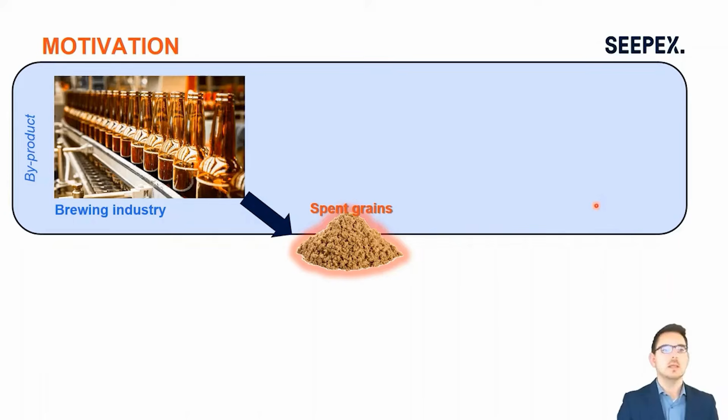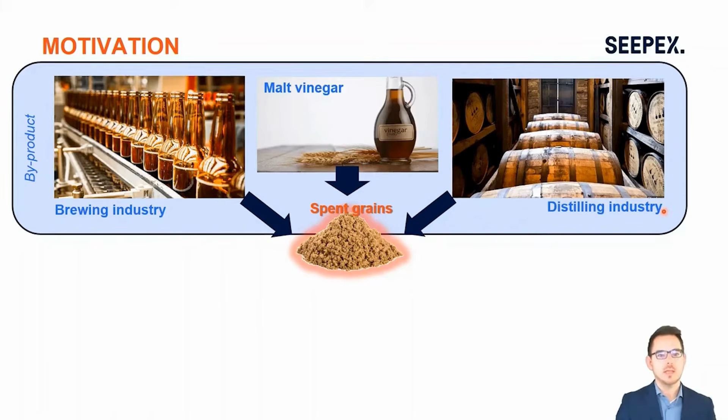Motivation. So why is spent grain transportation so interesting? Because it occurs in many of the industries. So we see it in brewing industry, also for the malt vinegar production, and also in the distilling industry, that spent grains are produced and that it's a byproduct for you in your industry, because you would best get quickly rid of this product because it's once processed and then it's for you not so interesting because it goes further into animal feed production, or also for the renewable energy industry for the production of biofuels.

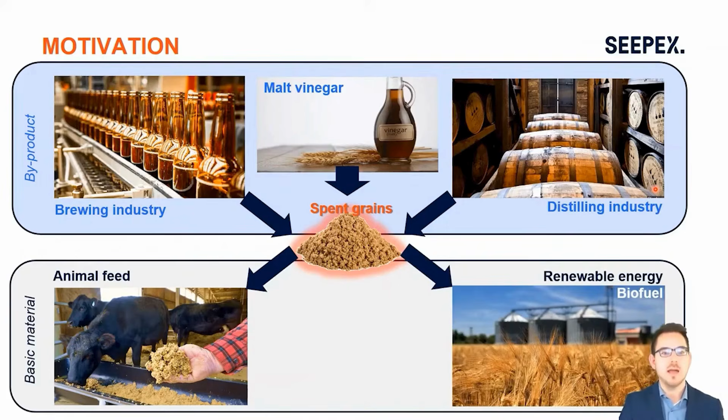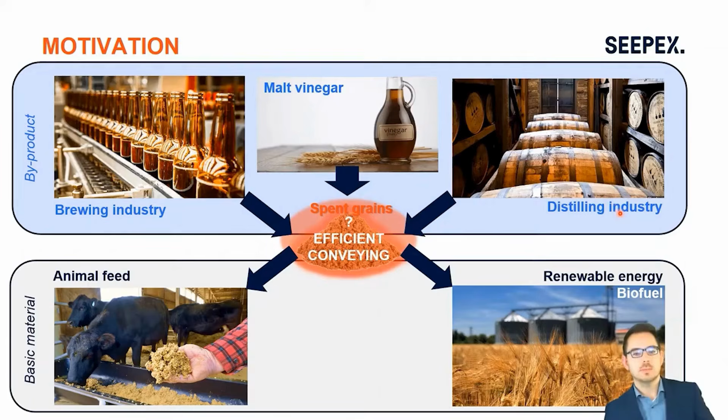And in all these steps, spent grain, which is highly abrasive and also viscous, has to be conveyed. And that's the question we are dealing with here. How is this spent grain transportation done very efficiently? A further motivation comes from the industry of brewing and distillery. We see increasing requirements on process efficiency in these industries. So especially total cost of ownership considerations get more common, and also the energy efficiency of all your processing equipment is quite commonly considered.

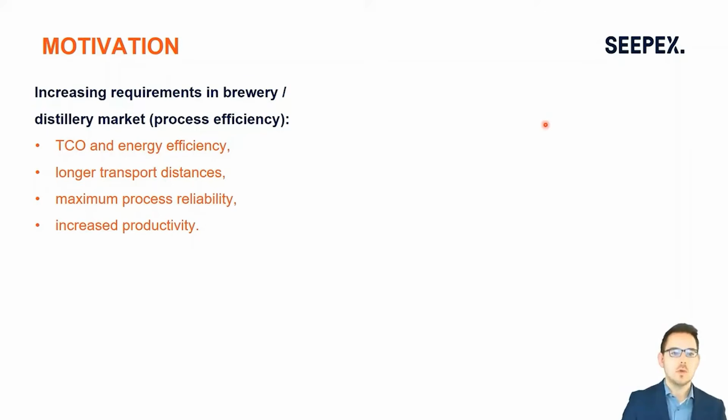And since the building density in most of the older and historical breweries and distilleries is rather high, more often when they would like to expand and increase their productivity, longer transportation distances of 100 meters and even more are quite common to occur. And another point is process reliability, especially when you have slight changes in your processing, different wetness content, in order to ensure that you stay with your productivity is quite important. And our answer to this is Smart Air Injection.

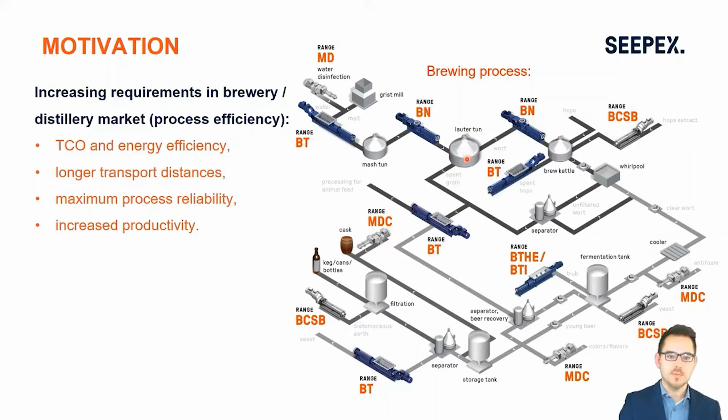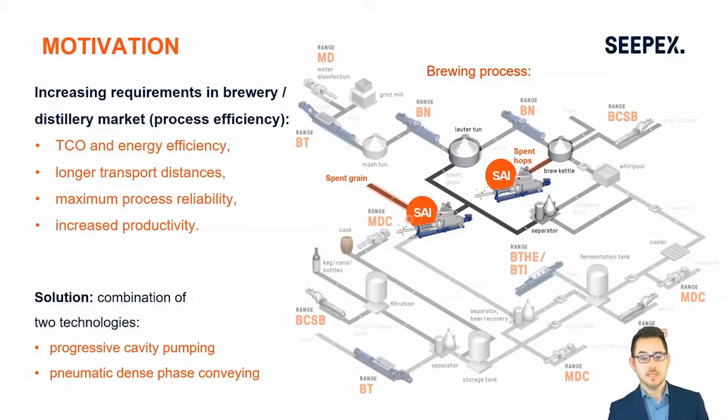So if you see it here in an example brewing process, after your lauter tun or mash tun or mash filter, when the spent grain is processed, we apply here a combination solution which is called SAI, and which combines two known technologies, which is a progressive cavity pump, that's our bread and butter skill, and that is combined with a way of pneumatic conveying, which is called dense phase conveying. In order to see the benefits of SAI, I would like to compare it to conventional solutions of pneumatic conveying, which are pneumatic expeller units like a Ponndorf or Wette unit.

And the challenge on conveying these spent grains is that it's highly abrasive and also highly viscous, and so could not very easily be conveyed by a pump over a certain distance. And the common way of doing this is by pneumatic conveying. First with a screw conveyor, so the spent grain falls from the mash tun or mash filter into the screw conveyor. It's conveyed into the discharge pipe, and then you use a type of lean phase conveying where this granular media of spent grain is blown with a constant flow of compressed air through your system and thereby conveyed onto your destination.

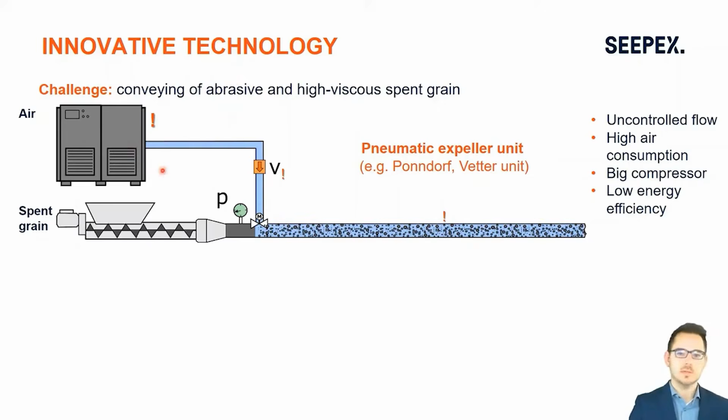And what you require here is a very high velocity of compressed air going through the system, and you need it constantly because it's an uncontrolled flow of compressed air, and therefore you need a very large compressor. So usually also for mid-range or larger breweries, we see compressors in the range of 100 kilowatt installed motor power, even more. And this is because you cannot buffer the compressed air on the way to the conveying, and you need it constantly all the time. So the compressor is running nearly all the time when you would like to convey your spent grains down the line.

In contrast to this, we see here on the bottom the smart air injection system, and it looks quite similar because you also have an air line where air is supplied to your system, and on the bottom the spent grain transportation line. You also have an extension hopper where the spent grain falls from your mash tun and mash filter into, and inside our pump a screw conveyor that first conveys the spent grain into our pump element.

This progressive cavity pump element is the main difference between a Ponndorf system and a smart air injection system, because we can thereby overcome a certain pressure level inside the pipework and use the usual way of pumping to generate 30 or 35 meters of plugs inside the pipework that are quite stable.

And this is only done by pumping. We then use the pneumatics to further convey this down the line like a pneumatic post system. So once those plugs are generated of spent grain by our pumping, then by a purposeful and short-term air injection, we accelerate those plugs and shoot them down the line.

That helps us because we do not need constant air, only very short and infrequent instances, which minimizes our air consumption and gives us the ability to buffer the compressed air used. We have time intervals of roughly 5 minutes between two injections, which allows a small compressor unit of 10 kilowatt installed motor power to achieve enough normal cubic meters of compressed air, buffered in a storage tank and then used every 5 minutes for the dense phase conveying down the line.

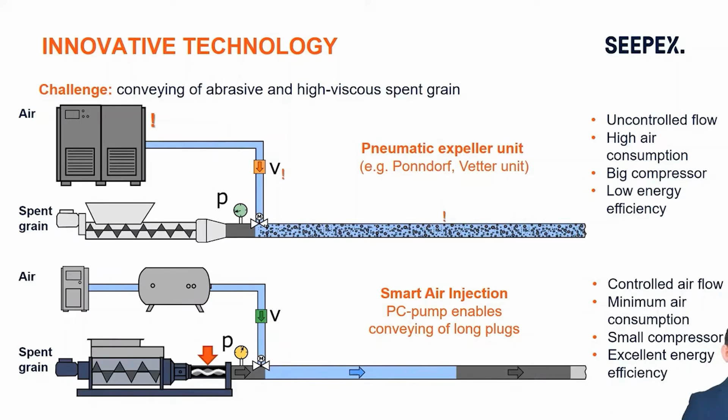What is the benefit you receive by this system? We could significantly reduce your total cost of ownership, especially regarding energy costs for air. In different validation studies we achieved a reduction up to 80% in air consumption, and that goes directly with the energy costs required.

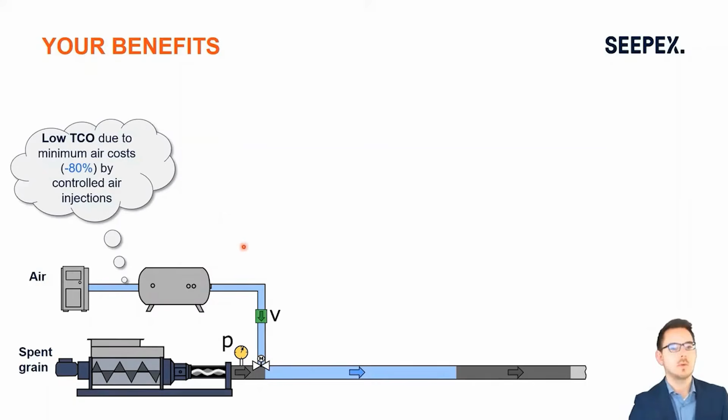We can increase the process efficiency because we reduce your mash out times. In some applications we could reduce from 55 minutes down to 22 minutes by exchanging the screw conveyor of an expeller unit with a progressive cavity pump, because it's rather constant and independent of the different operation points.

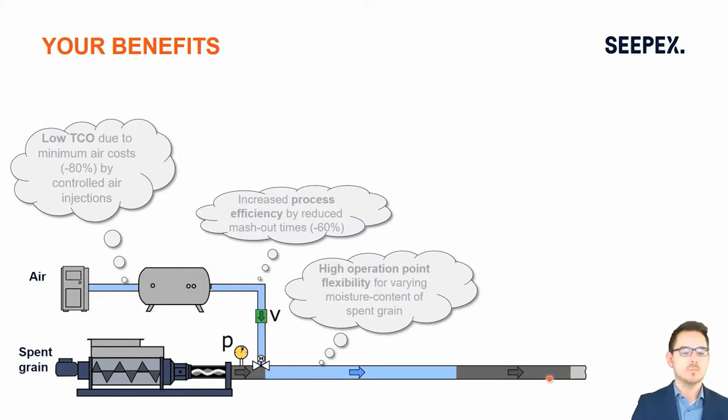So if you have varying moisture content in your spent grains, the pump runs independently and constantly the same, and the spent grain is further conveyed by dense phase conveying. If you have a stable plug of medium, it's independent of the moisture content and always runs the same, which makes this system quite stable.

We enable flexible piping, multiple bends is not an issue, and also vertical transportation of 30 meters and even more. We enable a transportation distance of up to 1 kilometer, because we use this type of dense phase conveying.

Another benefit we bring to the customer is that we reduce the wear sensitivity of your pipework. What we know from other larger breweries is that with a Ponndorf system they often have to replace their entire pipework every 3 to 4 years, because especially in the bends they have significant wear occurring, the material breaks down, and they have to replace the entire pipework.

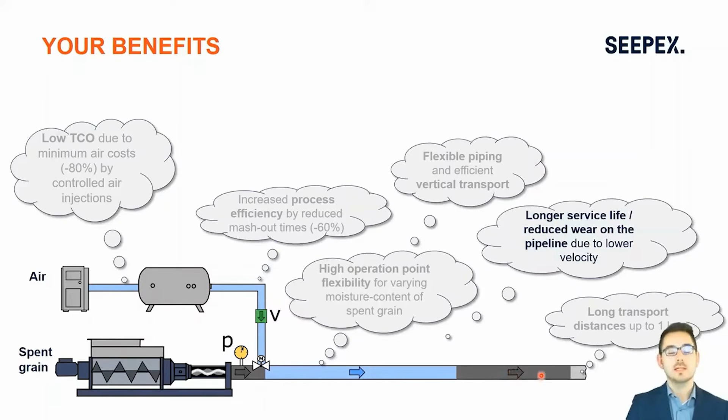But the benefit we have with this dense phase conveying of SEI is that we bring down the velocity of this conveying type to 3 to 5 meters per second, instead of 30 meters per second for the lean phase conveying of a Ponndorf system. That goes directly with the wear sensitivity of your system, and the systems we have set up with SEI have never had to have their pipework changed.

Let's come now to the conveying concept, the SEI controller logics, and the condition monitoring. If I tell you now a pneumatic system is very, very efficient, you are maybe struggling a bit. That was also my first impression, because I know from my studies at university that a compressor is rather bad in efficiency. Nearly 90% of its efficiency goes to heat instead of compressing the air.

But it could be efficient if you use it very purposefully. If you compare different types of pneumatic conveying, this lean phase conveying is one where you need air all the time, constantly, and you blow with very high velocity at a lower pressure this granular media through your pipework.

So from the ratio of air amount that you have to use and consume to convey a certain line, the loading of a medium is rather bad.

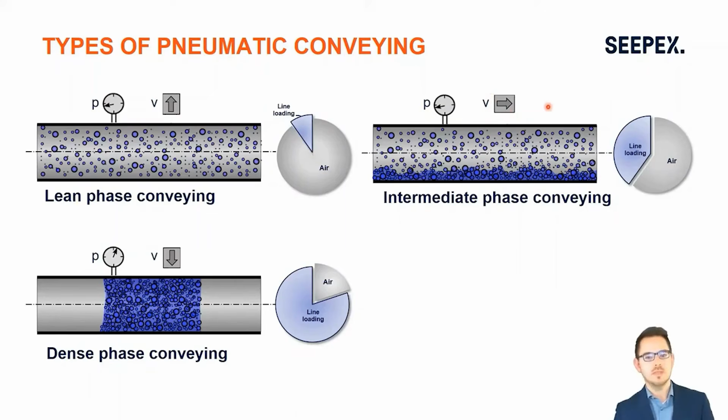We have in between this intermediate phase conveying, which is also quite bad. You have a swimming bed of medium on the bottom of your pipework. It occurs here at medium velocities of 15 meters per second, but also here the air consumption is rather high

compared to the line loading and to the conveyed medium. The only way a pneumatic way of conveying could be efficient is when you use dense phase conveying and enable very long plug medium. So 30 meters and even more will be achieved only by pumping, and then very short and infrequently you need purposeful air injections to accelerate those plugs and push them down the line. That is on rather low velocities, because you only have 3 to 5 meters per second compared to 30 meters per second, and that enables also to reduce highly your pipe wear sensitivity.

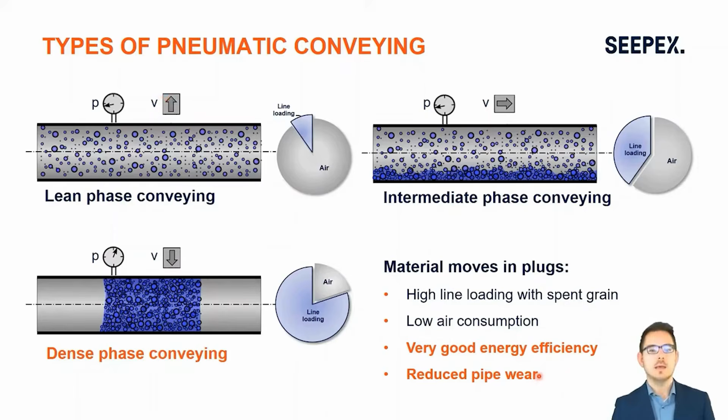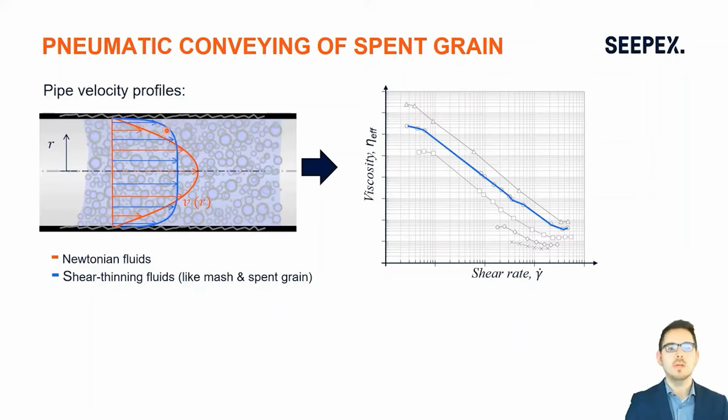And that's perfect for us, and we can make use of it. The high shear rates occur in a pipework where you have high velocity gradients. In this example, you see in the very boundary layer region of your pipework, that's the region where you have these rather high shear rates.

And if you have very high velocities, there are models describing this behavior of the fluid, but the important point is that the pipe shear rate goes proportional to the velocity of your system. That's why pumping of spent grains is rather hard, because it's occurring at relatively low velocities, and that means you are in a region where the viscosity and pressure losses inside your pipework are rather high.

But if you compare it now to smart air injection, due to the fact that we have these plugs and do the further conveying at high velocity, because we once accelerate those plugs and shoot them down the line, we are in a region where the shear rates are highly increasing, and it's increasing locally in this boundary layer close to the wall of your pipework.

And that's where we have reduced viscosity, making the fluid thinner by a factor of around 25. That's perfect for us because we're shooting these plugs down the line and they're fluidized around the circumference of this plug of fluid, making it easier to convey.

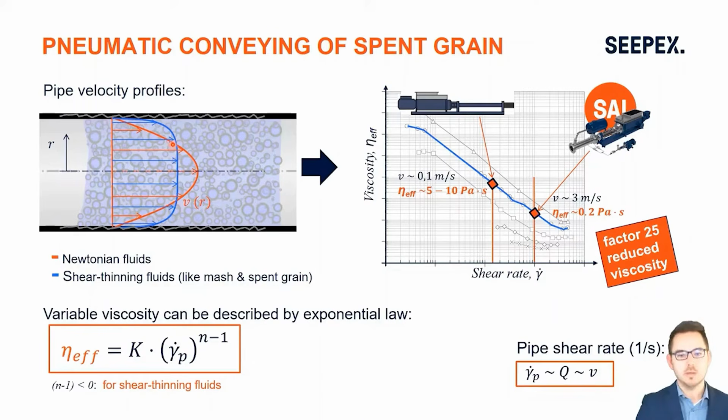To explain this behavior, a good children's experiment is ketchup, because ketchup is perfectly shear thinning. If you put a golf ball on top of a bowl of ketchup, it sticks on top of this layer because it's highly viscous. But if you let the golf ball fall from a certain distance into the bowl of ketchup, it fluidizes the ketchup because the shear rate is highly increased on impact of the golf ball onto the ketchup fluid. That's really the effect that we also use for smart air injection.

Let's see how the process looks in the end. This is a measurement signal that we recorded in a southern German brewery. You see here the signal is rather constant, and after injection, we receive nearly zero pressure inside our pipework.

Then only the pump is working, conveying this plug of material into the discharge pipework. Remember, this plug that we've achieved is 20 to 30 meters. Then we reach a certain pressure level, ranging around 3.5 to 4 bar, and we open up the solenoid valve and once accelerate those plugs of medium. We have a small peak here in the pressure, like a pressure spike, for once overcoming the frictional losses of this plug.

Once accelerated through the pipework, the pressure is directly decreasing until we reach our destination at the bottom of the silo, and the process restarts again where we have zero pressure again.

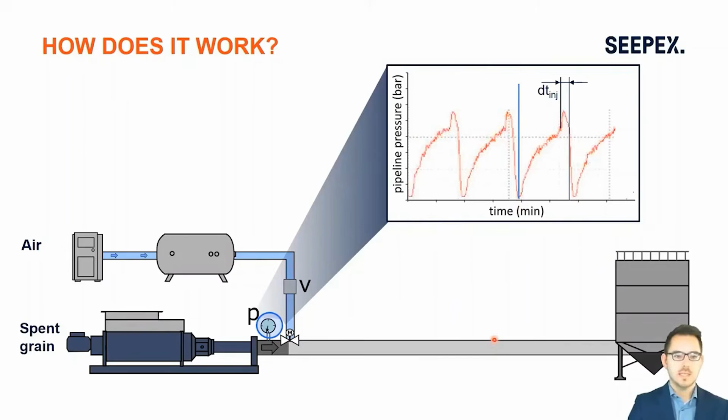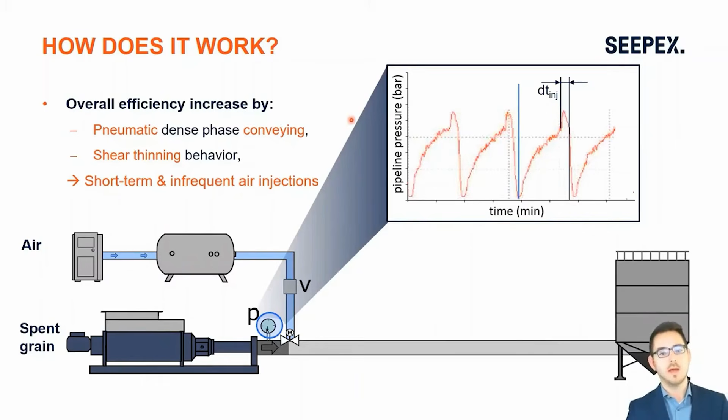So let's summarize. Why is this system so efficient? It's by two effects that we make use of. First, pneumatic dense phase conveying, a way of discontinuously conveying the spent grain through the system, so we need only very short air injections. It's even easier for us to convey it down the line because we make use of the shear thinning rheology of the spent grain medium. That leads to very short-term and infrequent air injections, and means we can apply a system of SAI for a large amount of spent grains with only 10 kilowatt of installed motor power.

The system comes as a package unit, meaning all the machines, like compressors, air receivers, and pumps, come along with sensors and actuators, all integrated into a control logic called the SAI controller. You see here a certain visualization of the process. You get access to all the control parameters, and the system controls itself in regard to flow rates and air injections, and we ensure that all safety functionalities are safe.

You have an overview of all your consumables like air and energy, so you have an overview of your operational expenses from the conveying process. And you have only one interface to your superior control system, so via all common field bus signals you get out here and into your control system.

Another option we've had since the beginning of this year is pre-compiled modular code components where the SAI logic is pre-compiled, and you can put it onto your PLC, your Siemens PLC, if it's already in use, and we can upgrade your own control logics by our SAI controller with a short visualization in HMI. You can then get access very flexibly and upgrade your PLC and control system with our SAI logics.

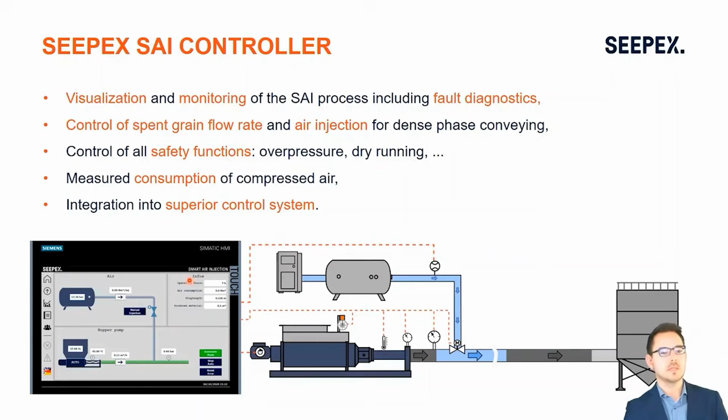If you need more safety and reliability on your system, we have the possibility to upgrade our SAI controller with connected services. That means you upgrade it with an IoT gateway or a pump monitoring system that enables you to get access via Bluetooth, by your mobile phone, so that on all your plant components you can get access to the status, the maintenance, and the protection status of your SAI equipment. If you have any warning set up or error signals, you get them at home and are warned in advance, early enough to react to any issues that might occur.

If you have different locations and multiple pumps set up with the pump monitoring, you can bring all the pumps together in the SEEPEX connected services. That's a cloud service where you get access via a web interface, giving you an overview of all your pumps, how they run at the moment, their status, and whether they require any maintenance in the short term.

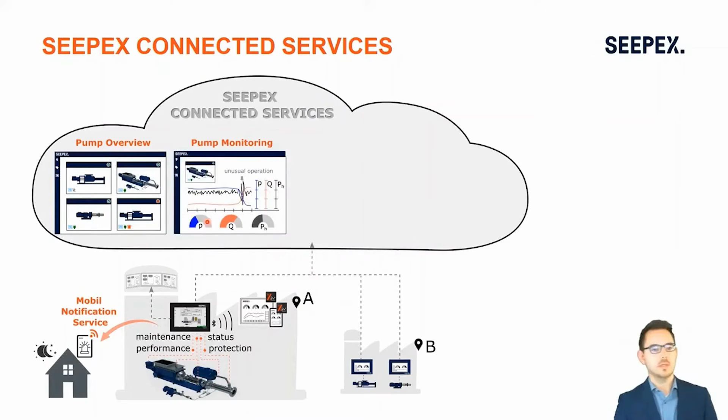You can click on every pump and see the current status, the historical data, and the trends of operation on these signals. You also have the possibility, through advanced analytics, to compare the current running scenario with the characteristic curve of your pump, which gives you the ability to have a wear indication. The system can warn you in advance when the wear status is increasing, and when you need a maintenance or service cycle where worn components are replaced. Anomalies can also be detected in advance when there is irregular operation of the systems.

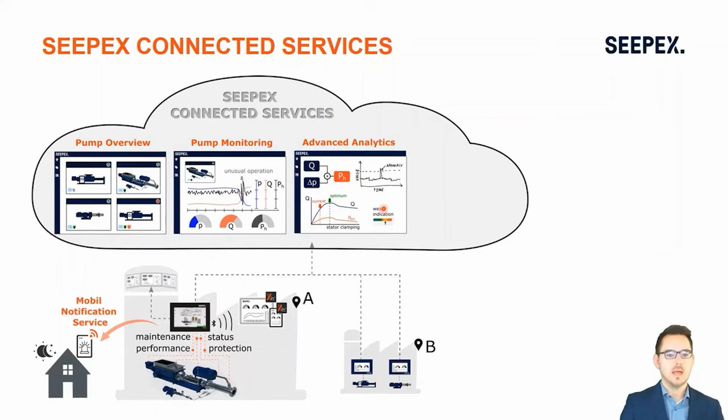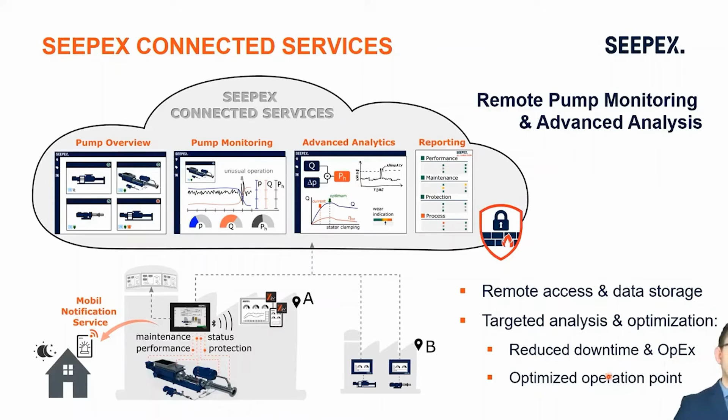Every month you receive a report telling you about the current status of performance of your maintenance components in the pump and about the protection ensured here. If you set up this system over the entire process, we also have the ability to monitor some of your process functionalities. In the end, you have full remote access to your running equipment and permanent data storage, and you can run targeted analysis and optimizations on the operation of your SAI systems. That helps you reduce downtime and operational expenses, and optimize the operation point of all pump equipment.

Let's go to the practical part and some references, where initially, some years ago, we replaced some of the existing expeller units with systems similar to smart air injection, where a progressive cavity pump replaces these screw conveyors. And there are two validation studies where full SAI systems are run and compared to conventional systems. At the beginning of the year we did a live demonstration in a southern German brewery, which was quite large,

What we achieved here is a reduction of air consumption of 80%. For conveyance of 14 tons per hour of medium, only 80 normal cubic meters per hour, which, if you calculate a compressor for it, is in the range of half a kilowatt, or 5 kilowatts maximum of installed power for the compressor.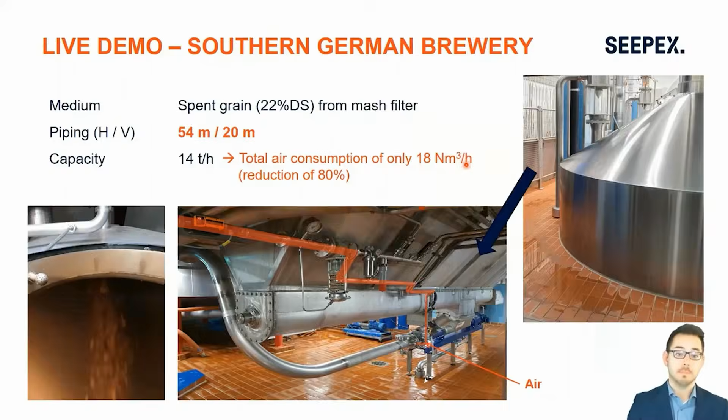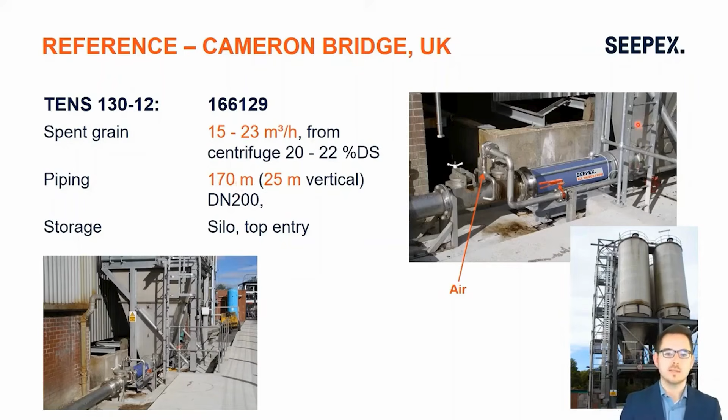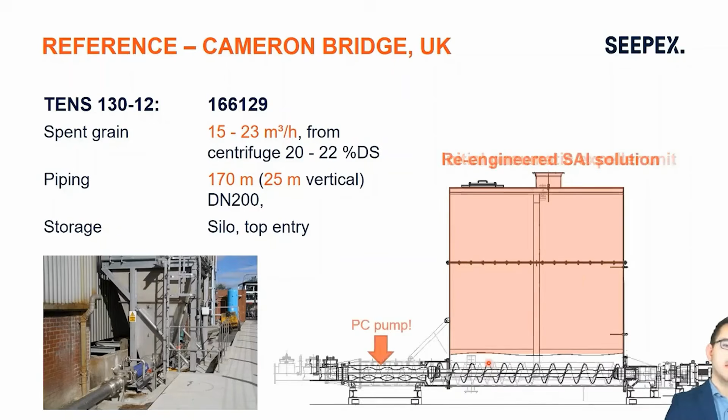The interesting thing here is that we have done a full re-engineering of the existing solution. You see this large extension hopper, which was reused from the initial expeller unit, and we only re-engineered the pre-existing screw conveyor, which was then replaced by, as you see here, a progressive cavity pump. It looks quite similar.

You also have at the bottom of this hopper a screw, which conveys the spent grain into our pump element, and here is a progressive cavity pump, which really makes the difference and enables us to bring plugs of 30 to 40 meters into the discharge pipework.

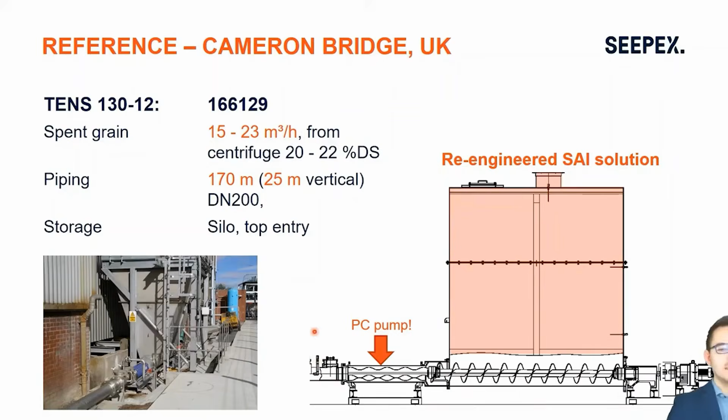Another reference we have is Midleton Distillery, Irish Distillers, where a large capacity of spent grain must be conveyed, 50 tons per hour per pump, and the pump is installed directly beneath a large lauter tun. Here too we replaced an initial expeller unit, so the air is already in place right in the discharge pipework, and we can make use of it.

The piping was 80 meters of distance, so it goes out of this building, over the street and on top of this silo, where it then falls into the silo to be stored.

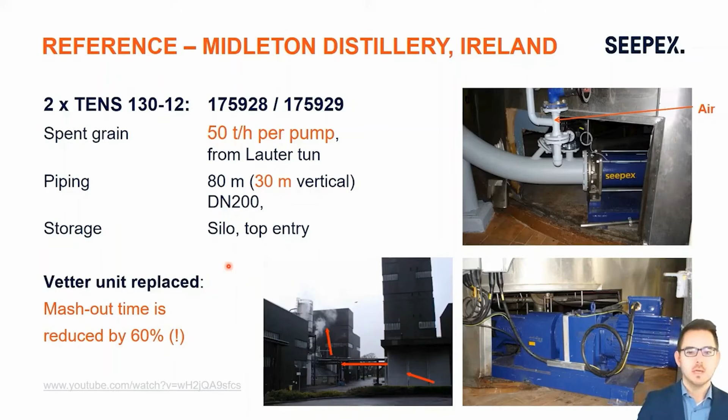Interesting here, we replaced a Vetter unit, and they were really struggling with changing moisture content and had a problem with mash-out times, which ranged up to 55 minutes. We managed to reduce it by around 60% and got a constant time of only 22 minutes in the end, which was quite impressive and helps a lot to increase the productivity of this system.

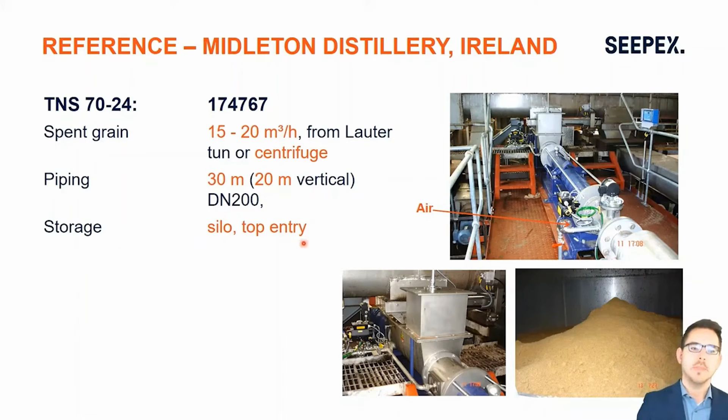They have another process step where spent grain transportation is used. We have a pump handling 15 to 20 cubic meters per hour, where the sludge comes from a lauter tun or a centrifuge, and the piping is only 30 meters and 20 meters vertical.

Let's come now to a promotional video that we also recorded together with Irish Distillers, because they were so satisfied with our solution, where we replaced the screw conveyor of an expeller unit with our progressive cavity pumps.

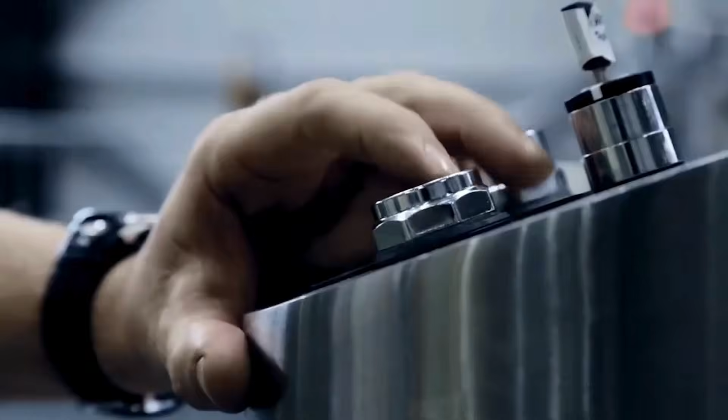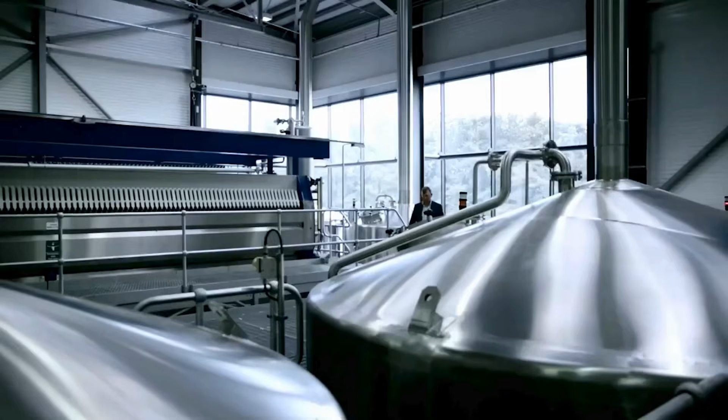We wanted to improve the productivity and our capacity as much as possible. The major problem was the transfer time for the draff from the lauter tuns to our feeds recovery facility. It was just taking too long.

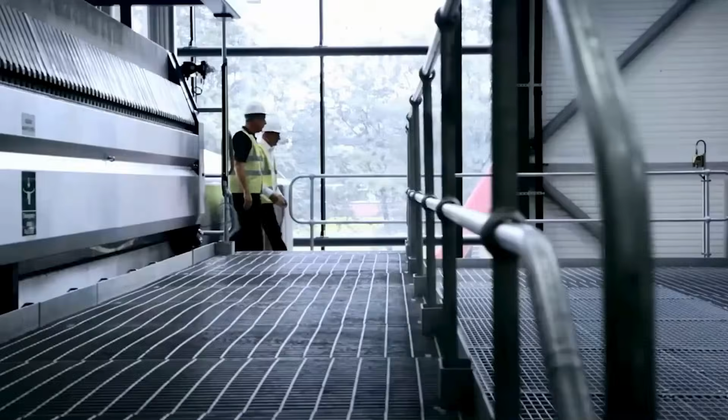The main objectives and targets we were set by Irish Distillers were to be able to transfer the products in less than 50% of the initial conveying time within the existing pneumatic system. So compared to the old system, where we had a conveyor transferring into a pneumatic transfer system, now we had a positive displacement pump effectively doing that transfer.

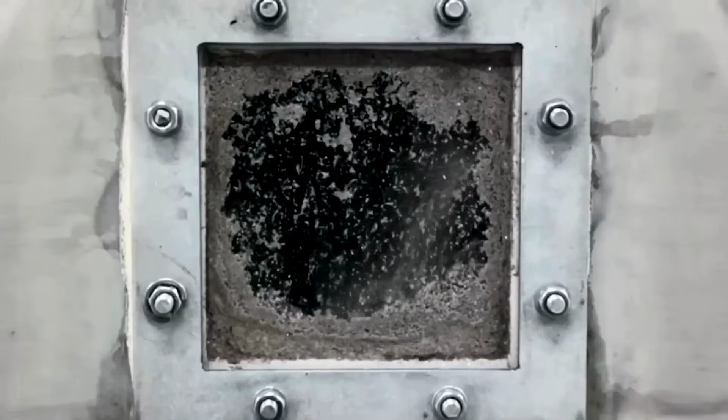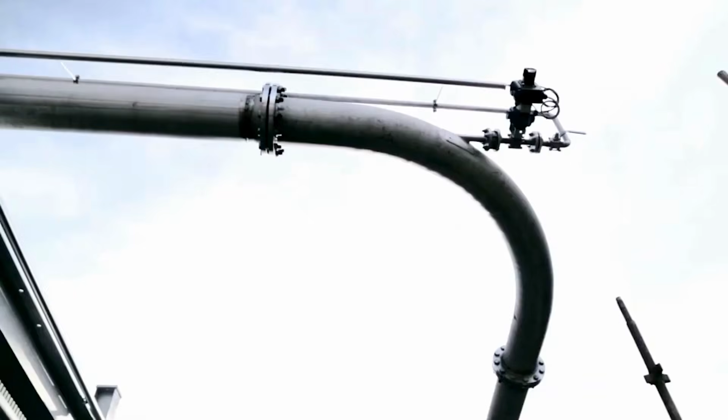One of the big features about the SEEPEX progressive cavity pump is its ability to handle a variety of products, and especially the ones which sit on the table and don't move and need assistance to get moving. We had to use a combination of pump technology and pneumatic blowing to assist the product down the pipeline the total distance. But it reduced the time from about 55 minutes to do the transfer to about 22 minutes.

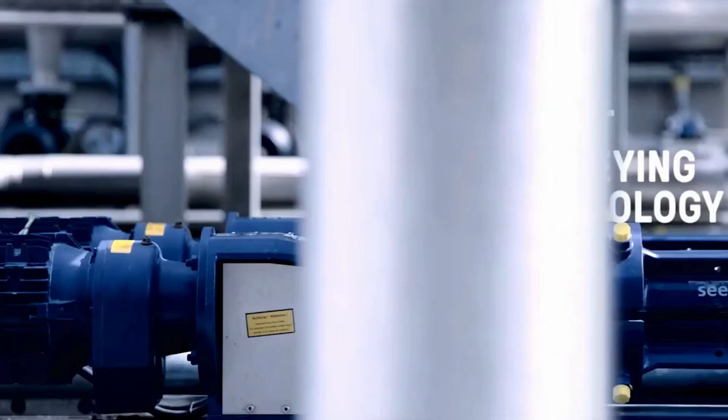Another application that we've been successful with at Irish Distillers is supplying our new Smart Conveying Technology. Our facility runs 24/7. There's a huge demand for our products. Any downtime is pretty much not acceptable. The SCT technology definitely helps. Instead of dismantling a whole lot of pipework, it's very easy to attend to a rotor or a stator, do an overhaul and get it back online quite quickly.

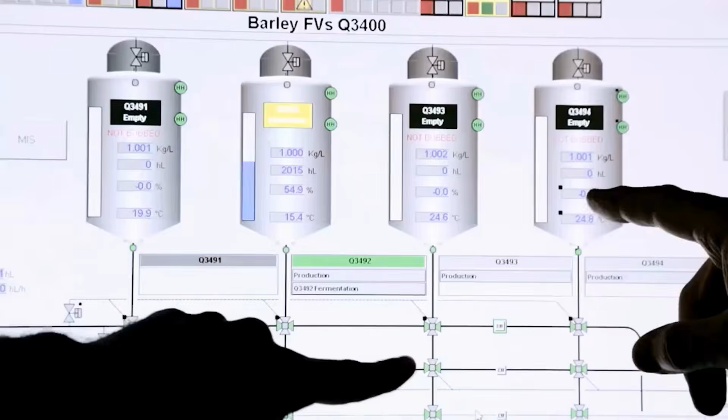So our consultation starts at the initial pump sale, and then after we've delivered the pump, we bring our consultation into the service and commissioning side to optimise their operating costs and to reduce the cost of ownership. We did achieve 50% additional productivity. SEEPEX played a role, which was fantastic. We're always seeking new emerging products that our customers want us to handle. These bring challenges to the company and lead to new innovations and application development. And as I say, good partners become long-term partners.

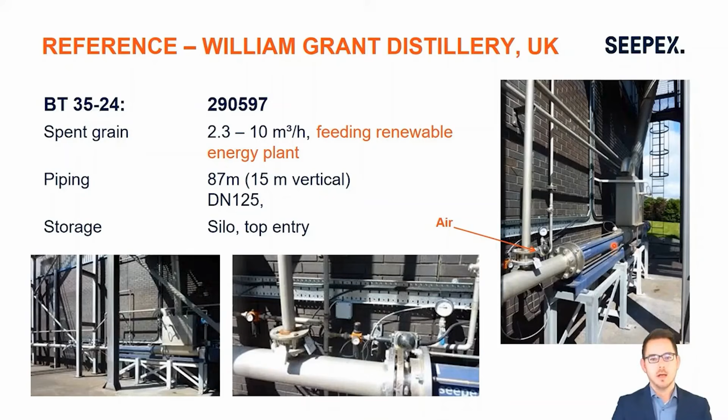So far to this installation at Irish Distillers and a very satisfied customer that we have here in the Irish market at a distillery. Let's come to further references. William Grant is also a distillery in the UK, where we have fed into a renewable energy plant, only 10 cubes per hour, but the distance here is around 90 meters and 15 vertical. And here we have also replaced and gone directly beneath the existing extension hopper, put our progressive cavity pump down here and reused the piping, including the air injections.

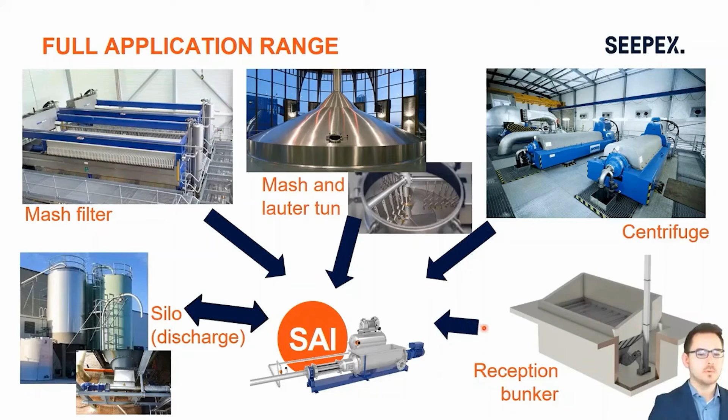So what we enable here with Smart Air Injection is a full application range. It's independent of whether you have a mash tun or a lauter tun, a mash filter installed in your processes, or some centrifuges, whether you would like to feed into a silo, or you have a silo discharge application where you put the pump below the silo and further convey onto trucks, or you would like to go for further processing below a reception bunker where trucks deliver the spent grains. All these applications can be used with SAI.

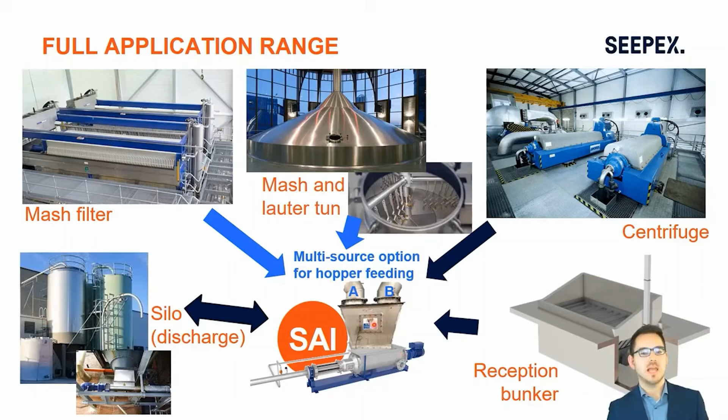We also have some applications where multi-source options are very interesting, so that you use one pump and one line for different process steps, from mash filter and mash tun, with the same equipment. That leads me to the first validation study, where we also have an extension hopper on our pump and two process steps. First, where the spent grains are transported, and the second inlet where spent hops get into the hopper. The capacities conveyed at St. Austell Brewery are around 4 tons per hour at a moisture content of around 80%, and for the spent hops it's only 0.6 tons per hour.

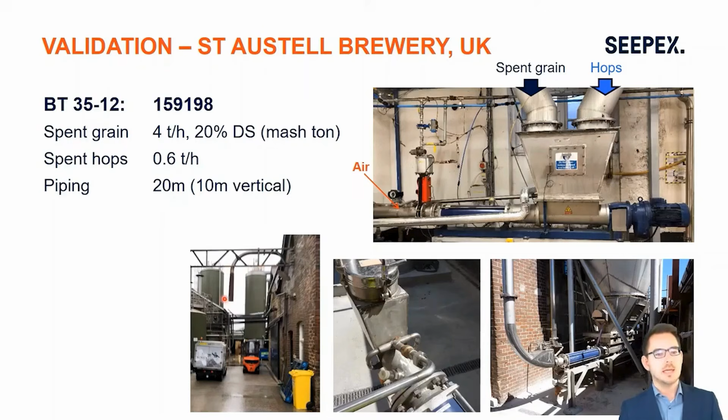It goes 20 meters down the line and 10 meters vertical, because after this pump it goes directly into the silo, which you see here in my picture. The mixture of spent grain and spent hops is stored inside and then further conveyed by a silo pump. So the discharge is also done by an SAI system. We inject the air directly after the pump discharge for further conveying, and then it goes down the line and is put down to the truck for further processing and unloading. We have done an upgrade here and compared the initial lean phase conveying situation with our SAI logic.

So we have used here also very long plugs, and then we have manually done the injection of air in our SAI logics, and we're thereby able to reduce the air consumption of initially around 300 normal cubes down to below 50 normal cubes. So it's around 90% in reduction here of air consumption for the spent grain, and for the spent hops around 80% in air reduction that is consumed.

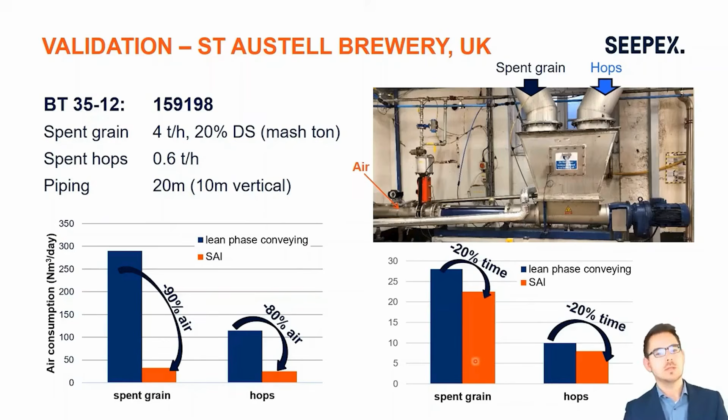The other way is here that we have looked a bit closer to the mash out times, and we come here initially from 28 minutes and go down here to 22 minutes, which is a reduction of 20% in mash out time by our SAI concept that was here applied.

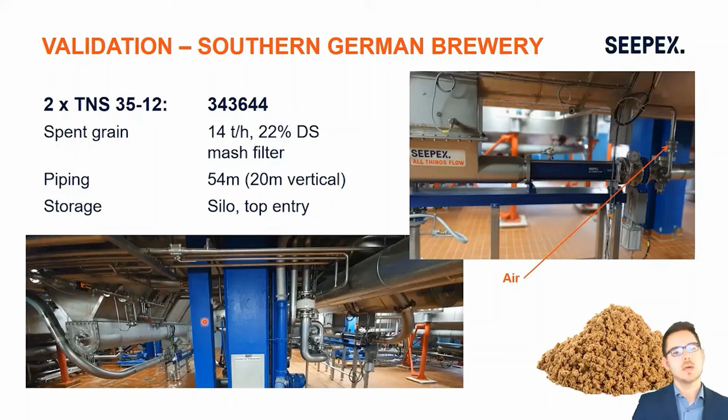Another validation study is here in this larger southern German brewery. So you see here that we have two parallel lines where we have done an SAI logics and have used our concept in contrast to the pre-existing Ponndorf system. And what we have achieved here is a reduction in energy, and also in the maintenance costs for the air components of around 12,000 euros per year. That could be saved by SAI in comparison to the Ponndorf unit.

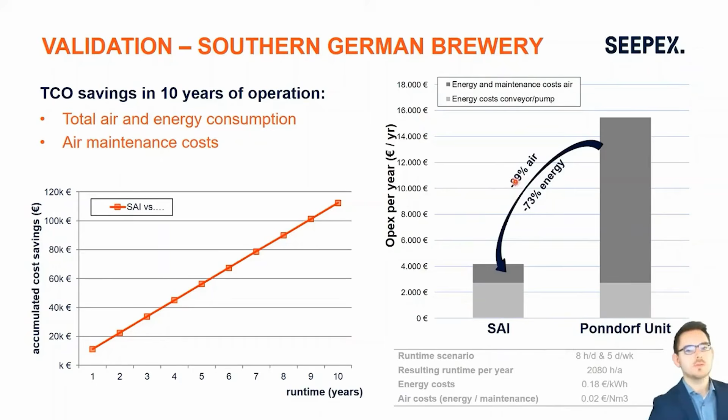And that's here really derived together with the brewmaster of this southern German brewery, which gave us a parameter on runtime scenario per year, brews per day, and about their energy costs and their air costs that they have for energy and maintenance. And if we accumulate those cost savings over 10 years of operation, this southern German brewery is able to save up to 120,000 euros in 10 years of operation, which was quite impressive. And that's done by this reduction of roughly 90% in air consumption that we have achieved here for this brewery.

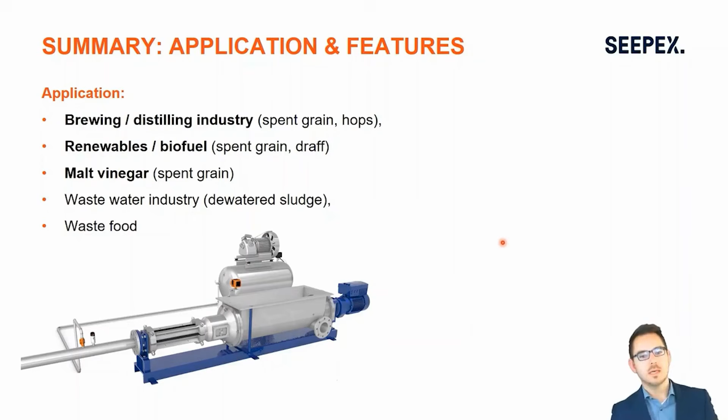Let's summarize our application. So where we are more and more coming into is the application in brewing and distillery market, where we used SAI for the transportation of spent grains and spent hops. Also for the renewable energies plants, where it's used all for the malt vinegar production. We come usually from the wastewater industry with SAI, so we are in the market with this product since 2017. Until now we have more than 50 systems running in the market and nearly 99% in the Central Europe region. So UK, Germany, Nordic, Netherlands, France, and also Italy.

The features that we derive here to you is a full package unit solution, so you receive all the pumps, air components, sensors, actuators. If you have already in place some air components, we can reuse it, and we will check on this. And these functional components are all integrated into our SAI software and our SAI logics. You receive from SEEPEX the full service package, so we clarify the application, we do a project coordination and also the system design for you, and a full commissioning of the system.

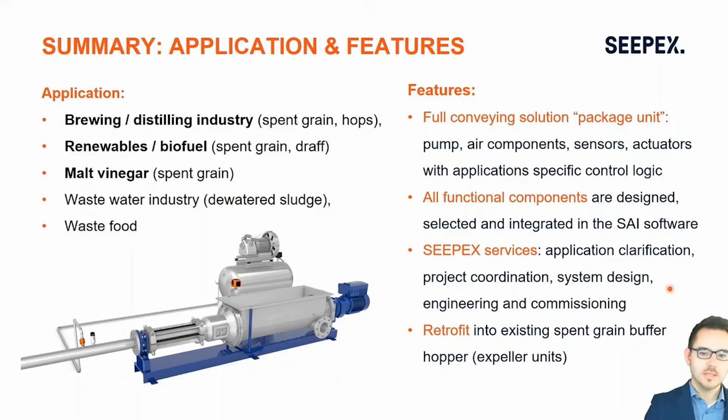And it's also here very important to note, we have full retrofit abilities. So if you have a pre-existing spent grain transportation system, you have a pre-existing buffer hopper by your existing expeller unit, and you have already air injection in place, we only have to exchange the screw conveyor by our pump, extend it by our SAI logics, and it can run like an SAI system. And that gives you great benefits.

To summarize here, you minimize your operational expenses because you have much less air and much less energy consumption. You increase your process efficiency because the mash out times are highly reduced. You have a very flexible operation point because if you have varying moisture content of the spent grains, the pump is independent of it, and also the dense phase conveying is nearly constant for change in moisture content.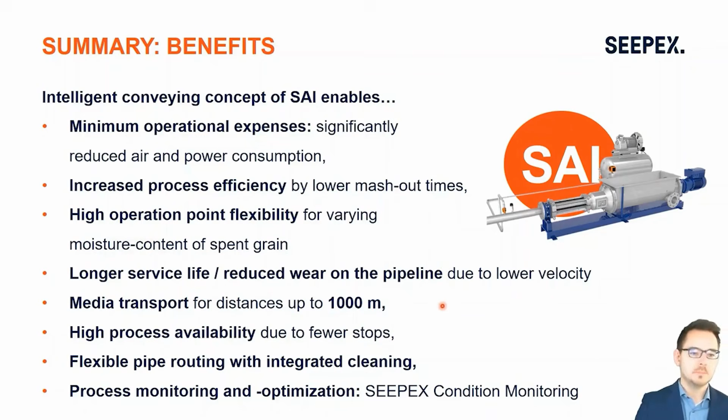You increase your service life of your pipe because you have a conveying here that is using a lower velocity, and the medium transportation can range up to 1,000 meters of distance. Process availability is increased because the systems are very reliable, and you have your integrated cleaning for longer downtimes, and also the pipe routing is quite flexible.